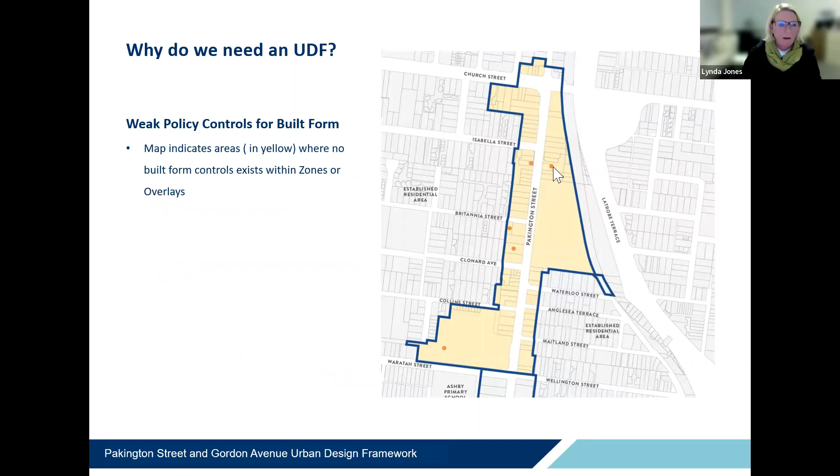Yeah, it's mainly mixed use commercial too, and there's a transport zone that applies to the railway land. So it doesn't have much in the way of overlays. Normally we'd use something like a design and development overlay to implement the UDF, so it's relatively weak in that respect.

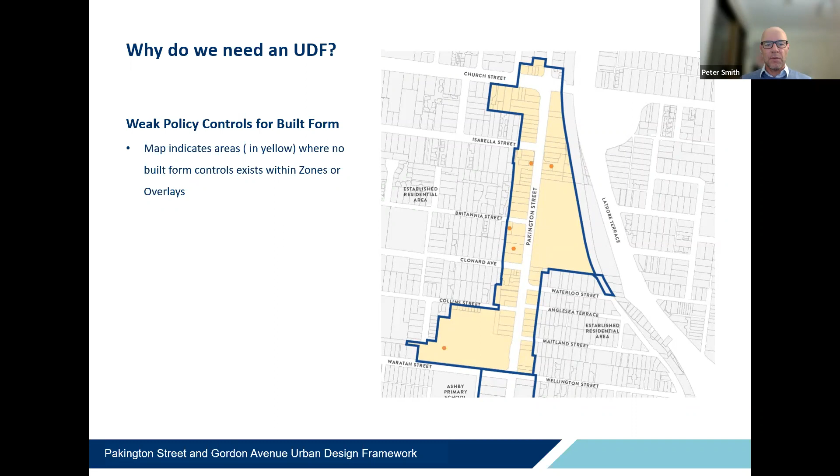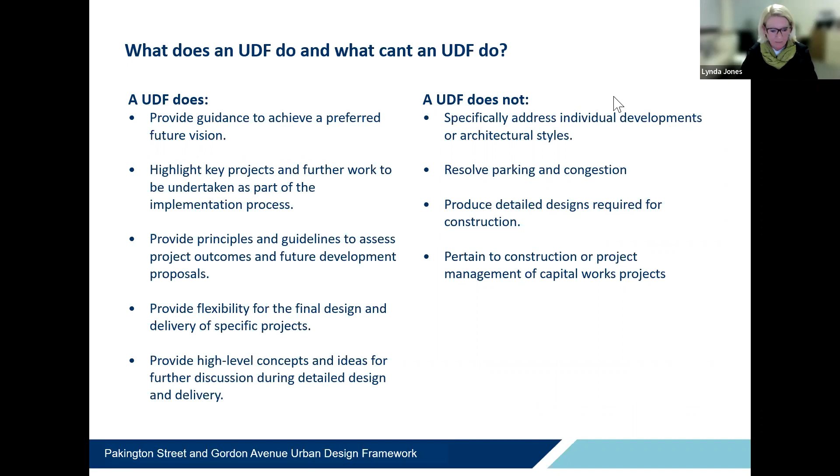Right, Peter. Now we had some questions, and given what you have just outlined on what a UDF can do and what it can't do, we might look at the two issues and associated questions submitted by community members. The first one is linked to greening the area within the UDF, which the community member commends, particularly the potential to mitigate any contribution to urban heating from the proposed development. Green leafy trees providing shade and comfort, helping to create a healthy, safe and attractive urban village, is part of the original vision as we said at the beginning.

The concern from this questioner is around the details of how greening will be realised. So the greening is there, we can see it, and it's spoken about in the UDF, but how will it be realised? They ask if a detailed landscape plan has in fact been prepared.

Just going on from that, there was a similar related question, and I'll bring this one in now. Another questioner asks whether landscaping will be a mandatory component of planning applications. What criteria will be used to assess the suitability of plant choice to ensure that it will provide a transition to low-scale residential areas? How will landscaping be maintained and how will this be regulated? So it's all about the greening and the landscaping. Where does landscaping fit in with the UDF and its implementation?

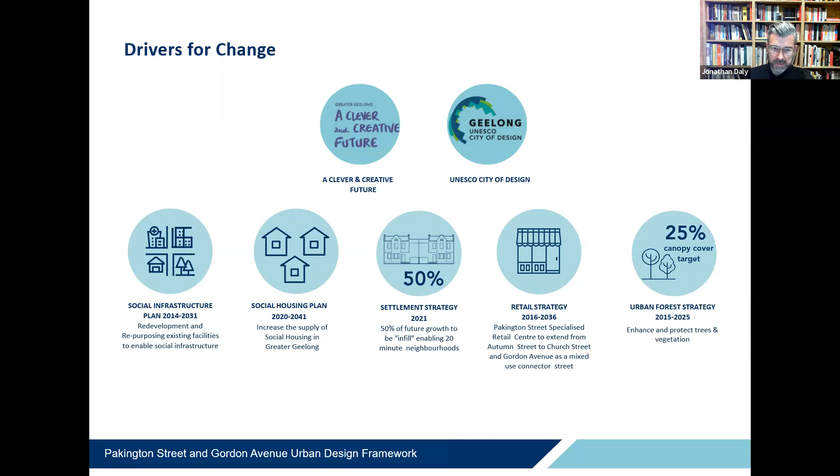We also do listen to the community, and we do make changes and adapt the UDF as we have done from the draft to the interim through to the final.

I know that there will be great interest in the changes that you have made between the interim and the final UDF. So if you could just explain them, but also include why they were made, what was the thinking behind it for those changes to actually be made.

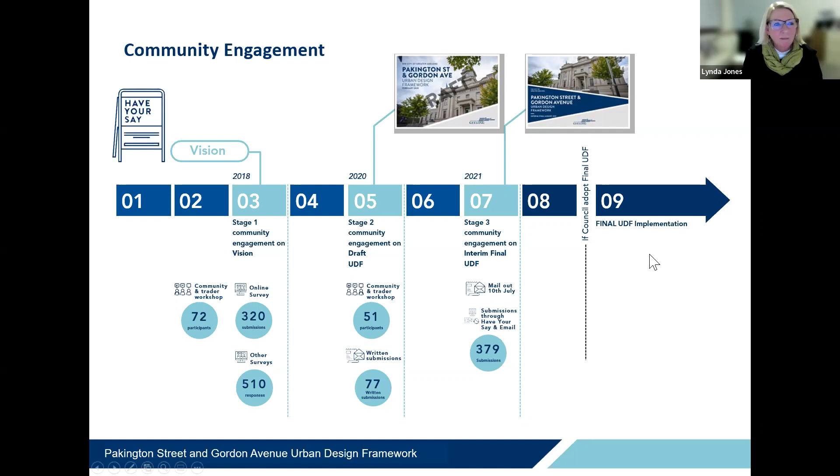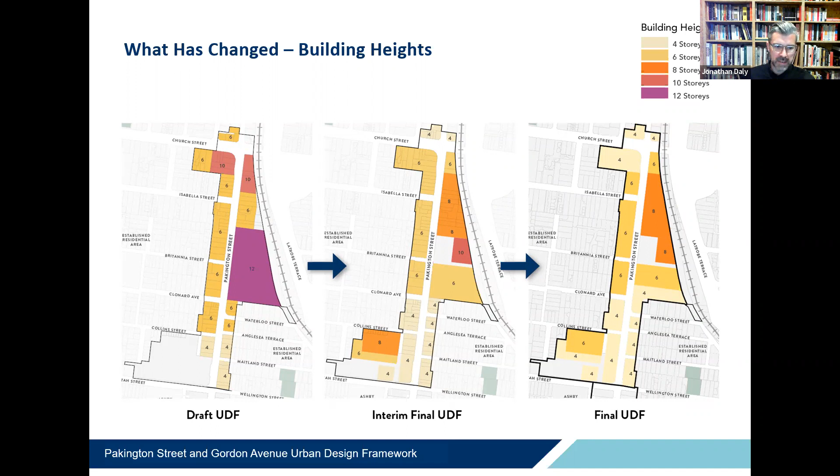A number of changes have been made to building heights in certain pockets, and the heights have gradually come down through that process as we've refined the UDF. We've also refined the transition in terms of our response to the residential interfaces, listening to the concerns of residents in areas that abut sites with additional height, gradually reducing heights or improving that protection between the proposed higher development and the existing lower rise residential.

So what you're seeing now is the final UDF, where we have reduced heights in a number of areas. There was some concern, for example, about the Strand site, and we reduced the maximum height on that site from 8 to 6. There was also concern about the two larger strategic sites in the Northern Precinct, the railway sidings, where we reduced that from a previous maximum of 10 to now a maximum of 8. And at the important interface between the railway sidings and residential properties on Waterloo Street, we've further reduced the heights on a portion of that block from 6 down to 4 storeys, and also extended the setbacks.

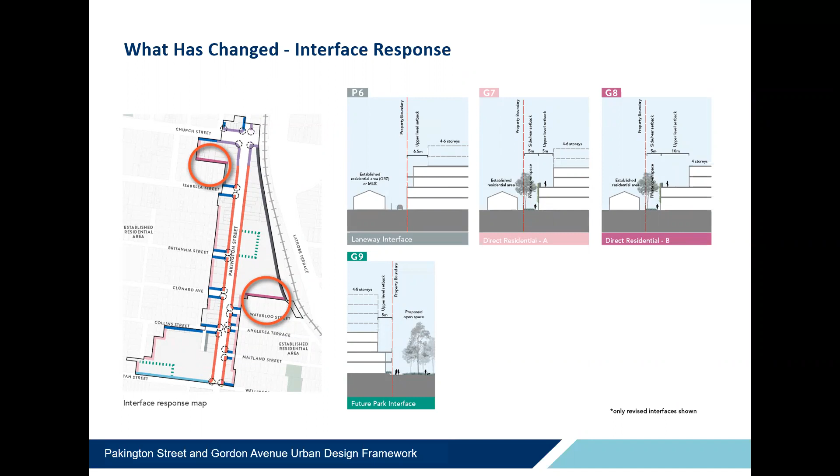How did the City of Greater Geelong arrive at the decision to introduce 8-storey buildings on Pakington Street as part of the UDF?

So the scale of development proposed in the final UDF was based on changing economic conditions and the infill requirements of council's adopted settlement strategy. That strategy proposes that 50% of all future population growth would be urban infill, an approach we're taking to all of urban Geelong, not just to Geelong West. So we're looking at those sites that are best able to accommodate that kind of density or those heights.

We've undertaken testing against the criteria we spoke about before, and it was understood that 8-storey developments would have the least impact on the heritage core and residential hinterland, because it's located adjacent to the railway tracks, so it doesn't have those sensitive interfaces with existing residential development. As I also mentioned previously, we're trying to strike that balance between the needs of the community and the development potential of those sites. They have to be viable developments, otherwise we wouldn't be able to meet the demand that exists for housing and for retail and so on.

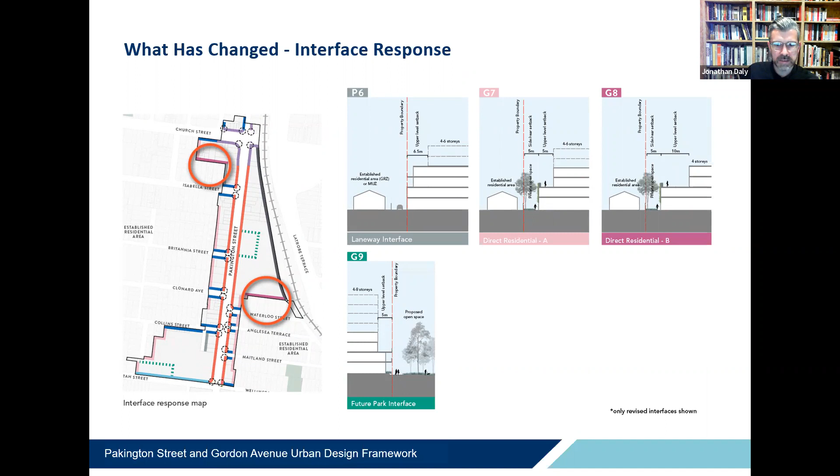Jonathan, I've got a question here from a couple of people about explaining the change in the interfaces. Do you want to take that now or later? We can take that now. It's simply about, could you explain more about the change in the interfaces? I thought we did cover that, I'm not sure what more I could explain. Okay, well, I'll wait to see if anybody else actually adds more. Maybe we can come back at the end if whoever asked the question could flesh it out a little bit. Yes, that would be okay. We'll do that. All right.

This next question from a community member says: Pakington Street is a desirable destination with its heritage houses and village charm. Some people fear the appeal of the village and destination will be lost through overdevelopment. Why is council not building on the appeal and success of the heritage core, and this relates to a number of questions that have been raised in the Q&A.

Building on the appeal and success of the Heritage Core by extending the two-storey building heights northward to the start of the rail yard site.

It's a good question, and there's a number of different things to consider. One would be, with the Heritage Core, we put in place protections in that precinct to ensure there's no future development of more than 2 storeys, really seeking to protect what's special about that area. But the Northern Precinct has a different character to the Heritage Core. Although, in terms of the 2-storey scale, we do seek to retain that by introducing what we call a street wall, continuing that street wall through the Northern Precinct with setbacks at the upper level, which then allow for increased development above.

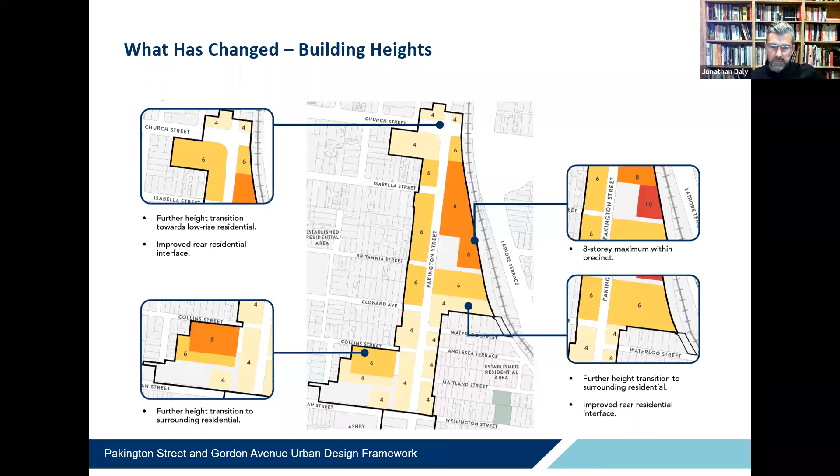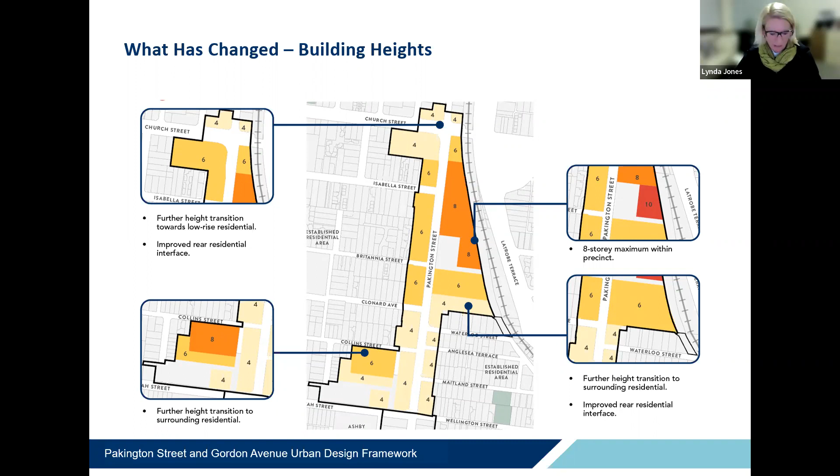A community member has focused on the 3D model of Pakington North, and everyone should go and have a play on it. It's very informative, and acknowledges that it includes the shadowing that will occur due to building development on Pakington Street itself. There are a number of comments on the Q&A regarding overshadowing, so this is fortuitous. The question raised relates to the impact of shadowing on the streets of residential houses behind the proposed buildings, given council has acknowledged that some overshadowing will in fact occur. So the member asked, when will full details of this overshadowing be made publicly available? And if this modelling has not been done, why not?

So if you could address that question, but also perhaps talk about shadowing in the area a little broader as well.

Yeah, so just to clarify, the testing has already been done. It was done prior to this round of engagement. It was done for the interim, and it was done for the final UDF. And those videos were made available on the Have Your Say page, so the community could go and observe the impact of the testing.

So in terms of the modelling for overshadowing, it was done prior to arriving at the interface responses, including the setbacks detailed out in the final UDF. So we've used the approach, the requirement to provide 5 hours of sunlight at the spring equinox. That's in line with state legislation, state policy. And further, we've also laid an emphasis on ensuring solar access to footpaths between 11 and 2 p.m. at the spring equinox. So there'll always be some overshadowing to some degree.

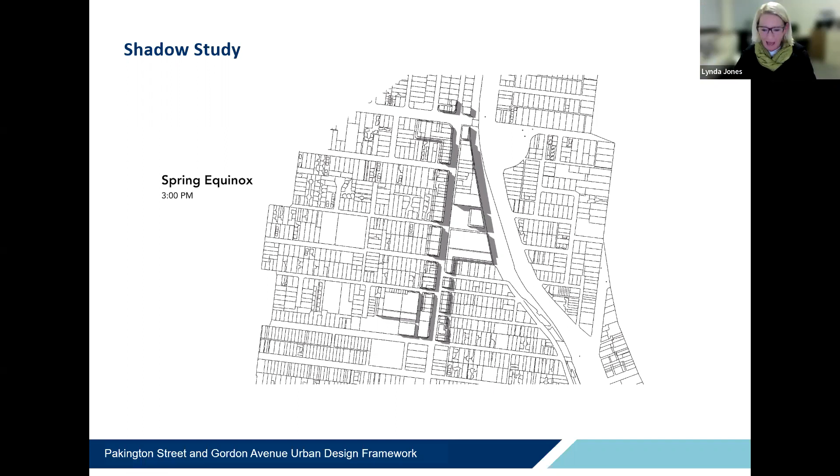Yeah, it's a little bit of a challenge because it's a very specific built form control. It's fair to say that it's not one that's widely applied, but for the community, it actually offers more protection in terms of development, because what it ultimately does is manage the amount of development on a specific site. They typically only apply to the larger, more strategic sites, because we never want to see those sites fully built out. We want to ensure that development in those sites is more broken up, that there's provision of open space and a greater consideration of the public realm within those sites.

So we would also be ensuring that there's permeability and connectivity to and through those sites. So the floor area ratios provide clear guidance on the expected typology, the type and the scale of new developments, to ensure a response that really responds to the site itself and to its surrounding area.

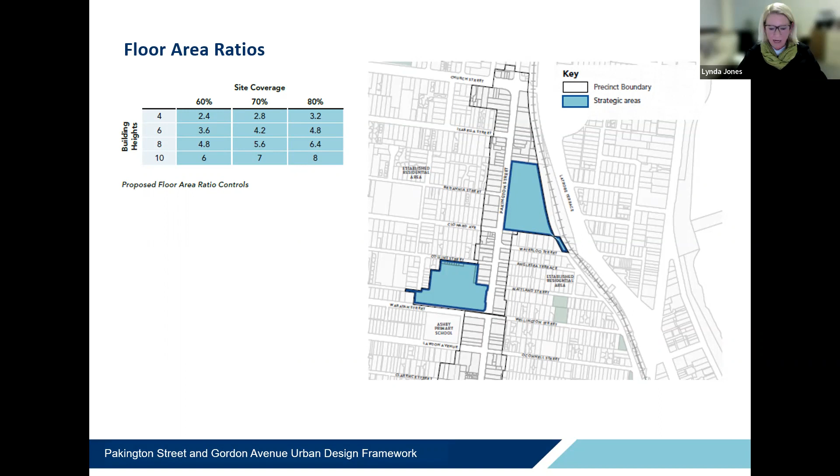Green roofs and green walls in building design are not mentioned in the UDF, the questioner points out. They further state that green roofs and walls can significantly mitigate urban heat in urban canyons, and their concern is that higher buildings envisaged for the top end of Pakington Street potentially create a heat tunnel. How does the council intend to ensure building design incorporates green roofs and walls in the precinct?

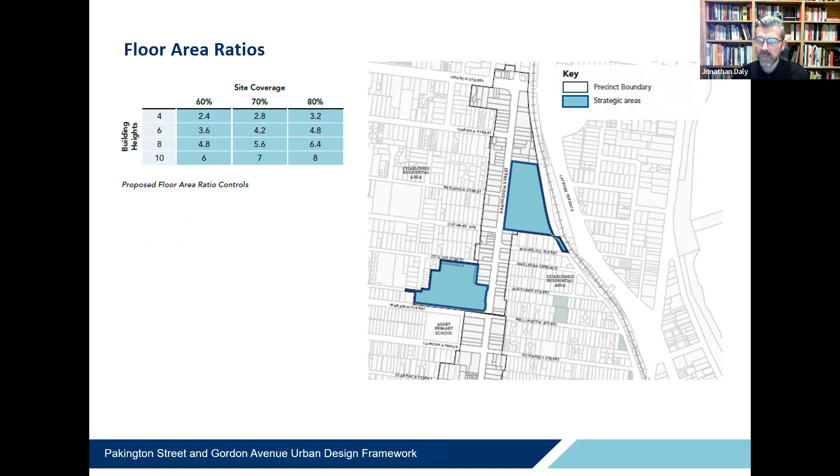So we have a number of different policies that all come into play when applications are being assessed. The city has an adopted position in terms of green roofs and greening in general, called the Urban Forest Strategy. That's available online for anyone to look at, which not only outlines canopy cover targets for the city, it also provides clear guidance in terms of the incorporation of green walls, green roofs, garden beds, etc., mostly within the public realm. So while the UDF doesn't specifically mandate these things, a landscape plan has to be submitted with all planning applications for these kinds of developments, and that would be assessed as part of the permit application process. Anyone that's had a look at the model will get a sense of the kind of greening that we're aiming for on Pakington Street.

This one relates to the UDF's recommendation that plant and services — like air conditioners — be designed and located to minimise any potential noise, visual or height impact on nearby residents. The community member asks what controls will be included in the UDF to protect residents from this impact.

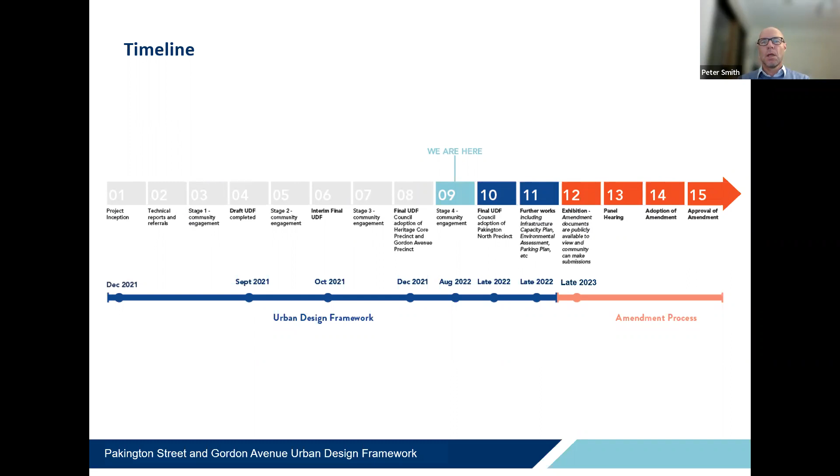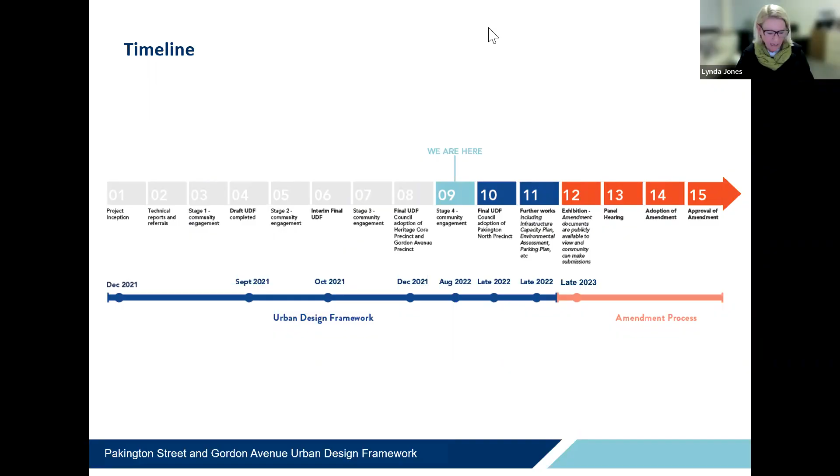Okay, thank you. I'm going to take you back to landscaping again. This questioner cites the UDF's encouragement of integrating landscape as a key driver of building design, and to provide rear landscape setbacks at interfaces to sensitive residential areas to manage the transition to low-scale residential areas, and asks: how will council manage the landscaping? For example, will there be a mandatory component of planning applications? What criteria will be used to assess the suitability of plant choice to ensure that it will provide a transition? And how will this landscaping be maintained, and how will this be regulated?

Yeah, there's a bit in that question. Yes. I think you have covered half of it.

Like if we're talking about something that - I don't fully understand the context - but if it's landscaping that would be required as part of a private development, for want of a better term, and someone applies for a planning permit, then it's required through conditions on a planning permit for something like a landscape plan to be submitted. That gets reviewed by our internal experts who know what species are appropriate for the job at hand.

And then it really comes down to it being the responsibility of the person doing the development, and I guess living there eventually, to maintain it. Enforcement isn't that strong, I guess, to follow up on landscaping, but it can be - if it's a significant area and people complain about it, we would do enforcement - but I'm not going to pretend that we're out there checking every bit of landscaping that's ever been approved in a planning permit. But there's definitely an intent there to encourage landscaping in the private realm.